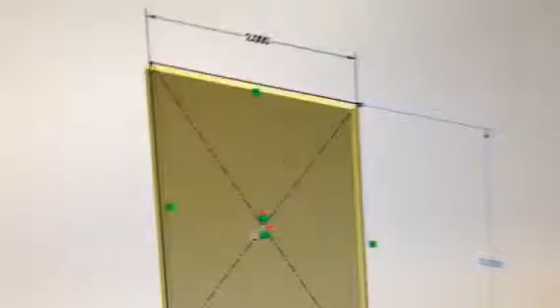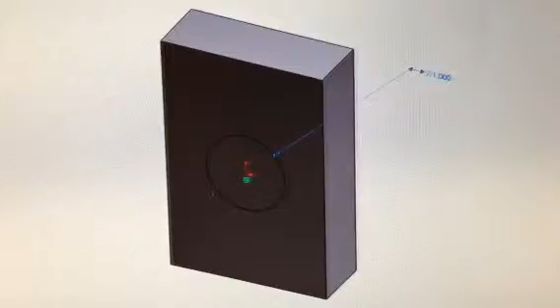Okay. Now I'm going to, on the face of the part, create a sketch of a circle. Dimension that. Very important that this is dimensioned for its size. I'm going to make a 1-inch diameter circle and create a feature, an extruded cut through all.

Save this part file in that folder, but I'm going to create a subfolder, a new folder, and I'm going to name this top-down demo. And this part I will name block. Not really a very imaginative name, but just the same.

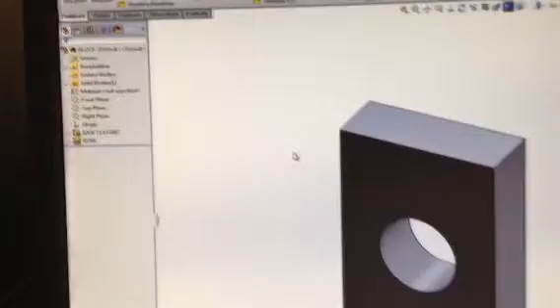Now I'm going to actually build a pin part that will fit into this hole. And in order to do that and have it follow along with that hole diameter, what I need to do is place this part into an assembly first. So I'm going to create a new assembly file. And I'm going to place that block part.

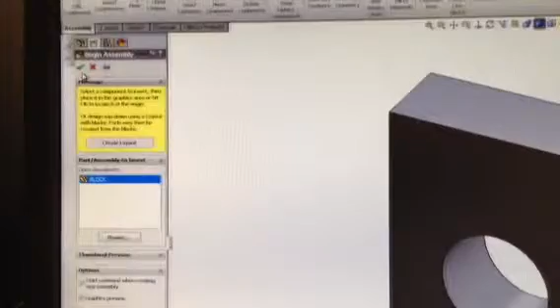Remember, if I want to put it right on origin of the assembly, I just go up here and click the green check mark. And now the part origin is the same place as the assembly origin. We're now looking at a file called Assem1, and I'm going to go ahead and save that assembly in the same location in top-down demo, and I'm going to name it block and pin. Save. So it looks like I've got just the block part, looks the same as that block file.

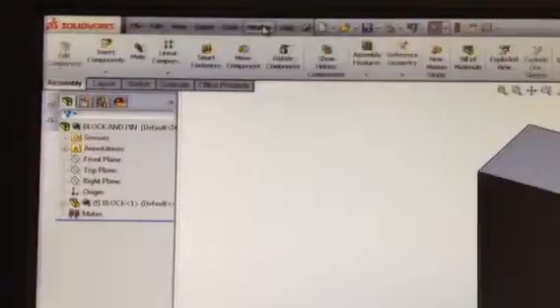But now let me go back, tile vertically, and show you that there's my block part. I'm going to go ahead and close that. This is actually an assembly called block and pin, and it has the block part created.

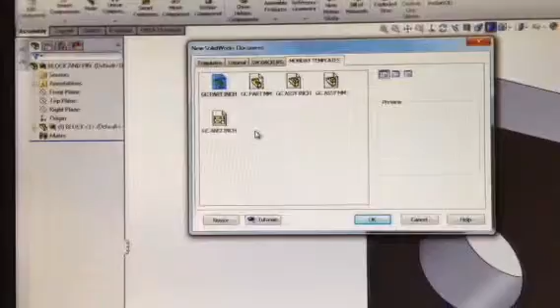Now if I were doing it bottom up, I'd go to File, and New, and create another part called pin, and I'd make it whatever diameter I needed for it to fit into that bore, and I'd come in and create mates, create an assembly. But I want this part to follow along with that diameter. So I need to tell it from the assembly level, from the top level, what diameter it needs to be.

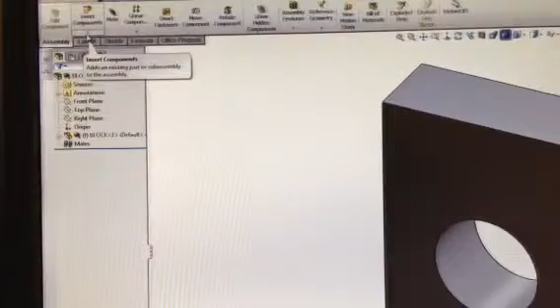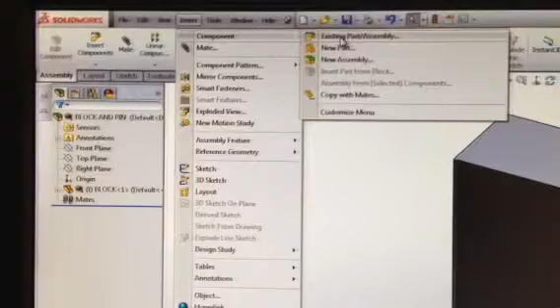The command that I'm looking for here can be found in that assembly toolbar, insert components. So I click on the black arrow here and choose new part. Or my drag down menu, insert component and new part. Notice that if I'm putting a component, just another part in the assembly, if I choose existing, that means I've built it bottom up. If I choose new part, that means I'm building it from the assembly level.

When I select that new part, if your computer is set up to prompt you to look for templates, it'll give you this interface here. It might happen to be set up that way. I can pick PC part inch. I don't believe your computers out there will be set up for that. We'll talk about that in a little bit. But for right now, I just pick that template, I click OK.

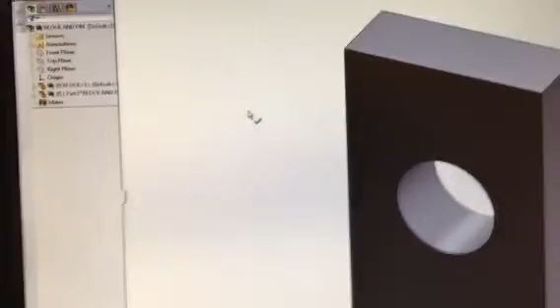And the next thing it does is really not very obvious at all. We get this little green check mark next to our cursor. If you look at the lower left corner of the screen, you see the sentence: Select the face or plane on which to position the new part. You may or may not have noticed that there's something that's shown up in the Feature Manager design tree called Part 3. And it has a little arrow and block and pin. If I hit the plus sign next to that, it has no features, has nothing to it yet.

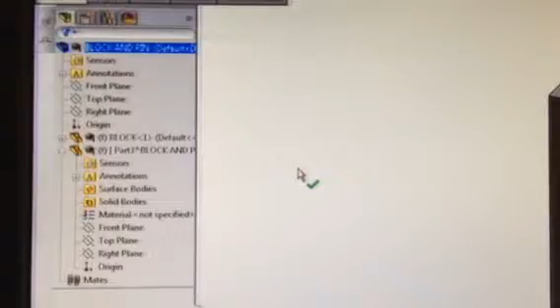But we're inserting a new component from that assembly, and basically what it wants to know is where do you want me to sketch to create this new part? I need a flat 2D plane on which to sketch. So I'm just going to pick the front face of this block part. Notice that when I move in towards the part, it goes from a green check mark to now showing me symbols for face or plane.

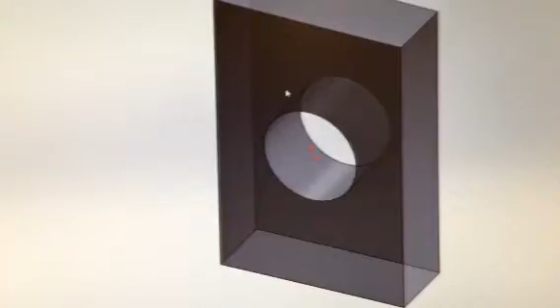As I pick this, watch what happens to the block part in terms of its coloring. It has now turned transparent. We have now seen a sketch icon show up here. We are now creating a sketch, and I expanded this part 3 over here.